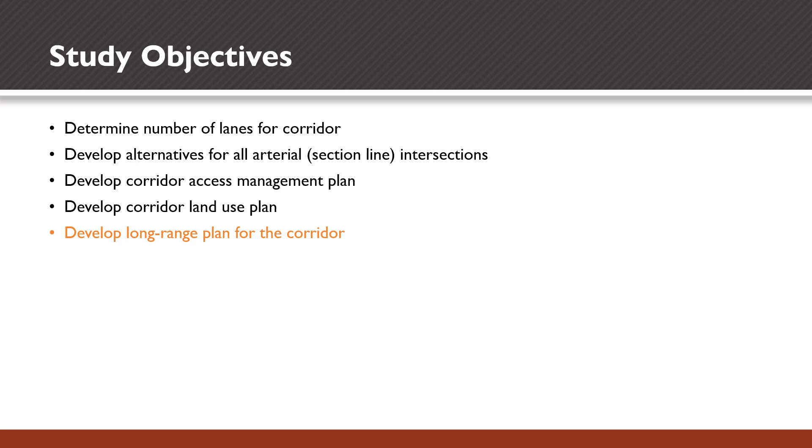There are 5 overarching objectives for the Highway 106 corridor study, and those include determining the number of lanes for the corridor, developing alternatives for all arterial section line intersections, developing a corridor access management plan and a corridor land use plan, and ultimately developing a long-range plan to help guide future planning and implementation projects while working towards a long-range vision of the corridor.

The study began in summer 2022 with data collection and baseline conditions analysis. Our first public meeting was held in October 2022, where we looked for your feedback on transportation-related issues and needs that we needed to address here as part of the corridor study. From there, we took that information and developed and refined alternatives, and most recently developed preliminary recommendations. We're bringing that information here to the second public meeting open house, and again, we're looking for your feedback related to the preliminary recommendations and the layouts. From there, we'll take that information, do any further refinement, evaluation, and ultimately looking to conclude the corridor study in June 2023.

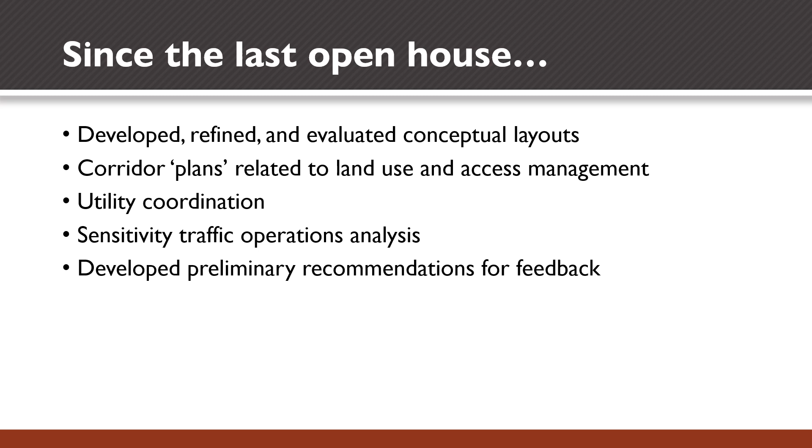Since the last open house, the study team has primarily focused on developing, refining, and evaluating conceptual layouts. This has also included developing corridor plans related to land use and access management, initiating utility coordination, creating a sensitivity analysis for traffic operations reflecting volumes that were higher than year 2050 forecasts presented at the first open house, and most recently developing preliminary recommendations for feedback.

There was considerable discussion in the first open house regarding future traffic patterns along Highway 106 following completion of Veterans Parkway between I-29 and the existing Veterans Parkway on the east side of Sioux Falls. Upon full completion of Veterans Parkway, we anticipate that there will be an immediate shift in traffic from Highway 106 to Veterans Parkway, and that will lead to a decrease in Highway 106 traffic volumes until additional development occurs along the Highway 106 corridor.

So based on feedback from the first open house and discussions with the study advisory team, we created a sensitivity analysis to increase Highway 106 traffic volumes beyond what we showed in that first open house for year 2050 planning horizon forecasts. And this accounts for that what if.

What if future development occurs quicker than anticipated, or that development occurs at a higher level of density and thus generates more trips, or development access is more focused to the Highway 106 corridor and less focused on the north-south arterial roadways. So this sensitivity scenario reflects Highway 106 volumes that are approximately 75% higher than what was presented in that first open house meeting for year 2050 planning horizon volumes.

And this accounts for additional east-west through traffic on the 106 corridor and more traffic turning to and from the north-south arterial roadways. The one thing I want to stress here is that all preliminary recommendations account for the analysis of these volumes, and the layouts shown here in this public meeting accommodate the volumes here within this scenario.

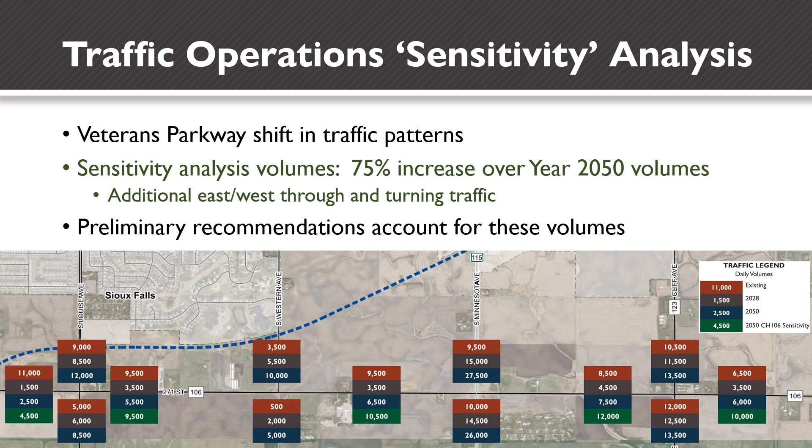The remainder of the presentation focuses on preliminary recommendations, and we've broken these slides into 3 main components. The first includes guidance type recommendations such as corridor land use, access management, and corridor typical sections. Next, we move into an overview of the recommendation timeline framework, and that sets the stage for the final component, which is regarding conceptual or layout type recommendations, looking at arterial intersections and roadway segments between the arterial intersections.

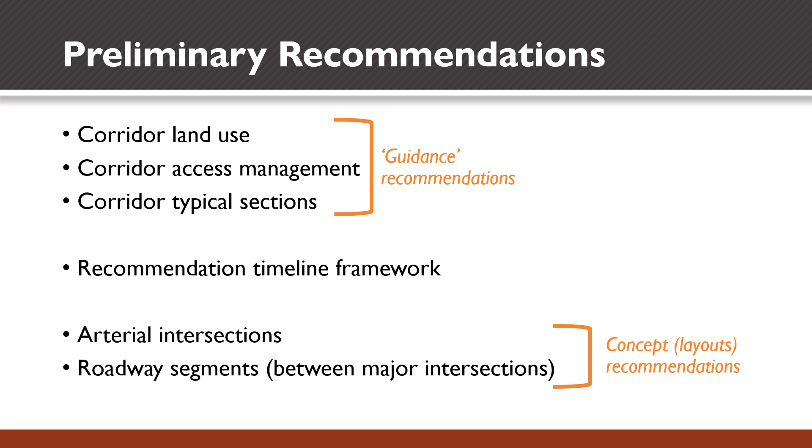The Highway 106 Corridor Land Use Plan is based on City of Harrisburg and City of Sioux Falls comprehensive planning efforts to date. Node-based employment centers are located at each of the arterial intersections along the study corridor. From there, the primary land use is anticipated to be residential, with higher density residential along the arterial corridors and transitioning to lower density residential as you move away from the arterial corridors. The land use plan also identifies existing natural detention areas, proposed City of Sioux Falls detention areas, and culvert crossings requiring drainage considerations and further analysis.

The Corridor Access Management Plan establishes a framework for managing existing and future access along the Highway 106 corridor. These recommendations are based on City of Sioux Falls Type 3 arterial guidance, which provides for full movement access points at quarter-mile spacing, signal spacing at every quarter mile, and median openings at 660 feet. Unsignalized access points may be added through analysis, and the separation between those access points varies.

Recommendations for managing existing access points are recommended to occur through future development, redevelopment to a higher land use, and transportation projects, and could accommodate a variety of different methods typical to the Sioux Falls MPO area.

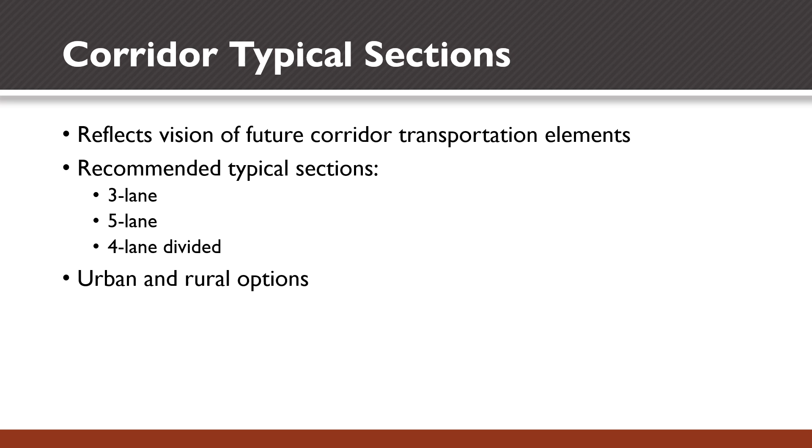First is the 3-lane typical section, which reflects a single through lane in each direction plus a continuous center left turn lane. Shared use path is located on both sides of the Highway 106 corridor out near the edge of the right-of-way to provide maximum separation between the shared use path and the vehicular travel lanes. The top view reflects the urban typical section with curb and gutter. The bottom view reflects the rural typical section with shoulders and roadside ditches.

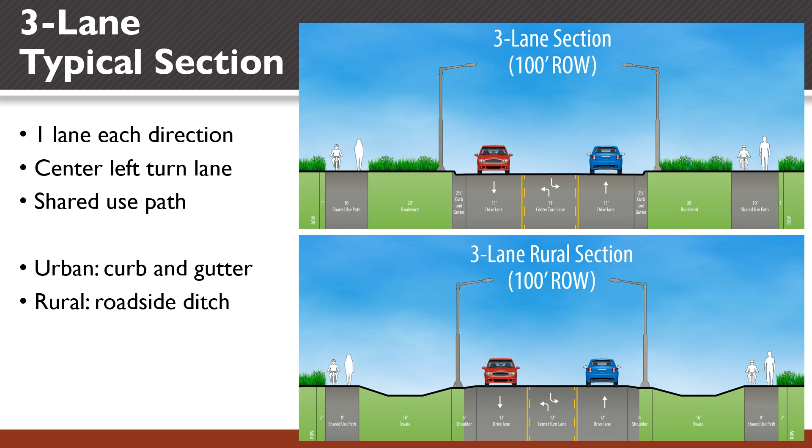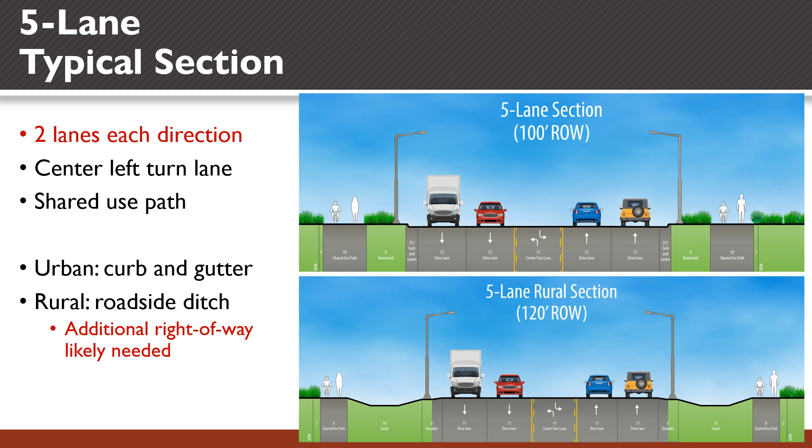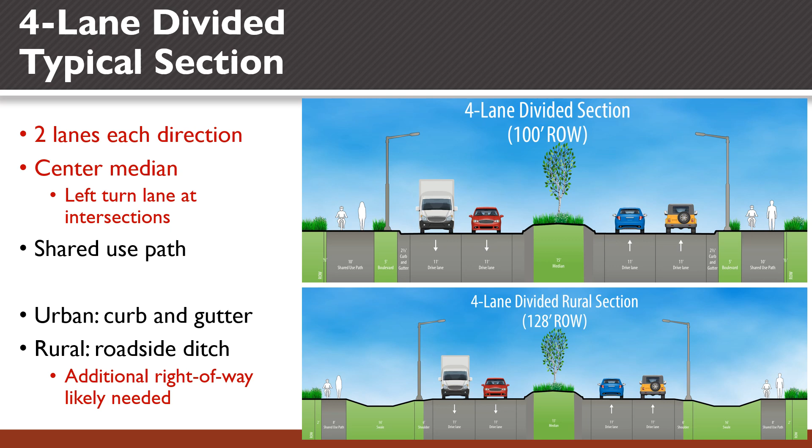Recommendation timelines were developed to support flexibility in planning for and implementing future projects based on corridor needs. With the anticipated shift in traffic volumes to Veterans Parkway upon its opening between I-29 and 57th Street, much of the long-range corridor traffic on Highway 106 will be generated by future development in the area. Therefore, recommended timelines coincide with Sioux Falls and Harrisburg growth area timelines and allow flexibility to adjust with any growth area updates. The short-term recommendations reflect implementation in the 0 to 10-year time frame and coincide with the initial growth area between Louise Avenue and Southeastern Avenue.

Midterm is the 10 to 15-year range, reflecting continued development between Louise Avenue and Southeastern Avenue, as well as a prompt for potential needs extending east to 480th Avenue. The long-term time frame reflects 15-plus years and circles back to the initial growth area between Louise Avenue and Southeastern Avenue to determine whether additional capacity enhancements are needed, such as intersection modifications or expansion to multiple lanes in each direction along Highway 106.

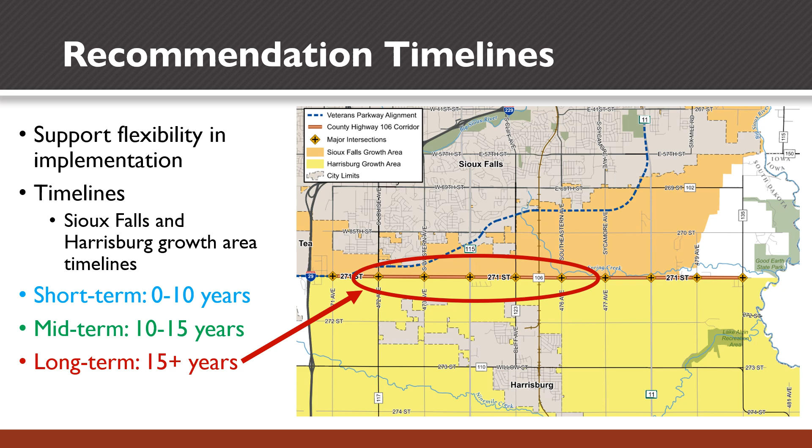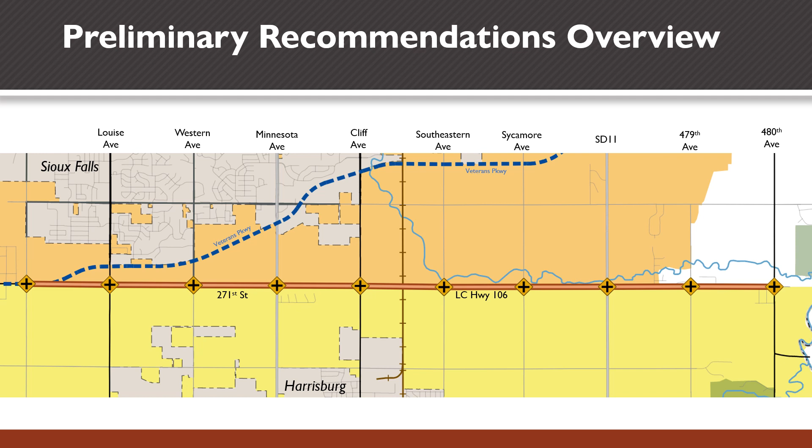The next few slides present an overview of the preliminary recommendations using the base map shown here, which includes intersections from Louise Avenue eastward to 480th Avenue.

Preliminary short-term recommendations focus on constructing a three-lane section between Louise Avenue and Southeastern Avenue to accommodate future traffic growth due to anticipated development in this area. There are two intersection options at Louise Avenue, Western Avenue, and Cliff Avenue, and Southeastern Avenue for your consideration, including a roundabout or stop control that transitions to traffic signals when warranted by traffic volumes. To the east of Southeastern Avenue, no modifications are recommended outside of monitoring major intersections for improvement needs and the planned South Dakota Department of Transportation project to reconstruct South Dakota Highway 11, which includes the Highway 106 intersection.

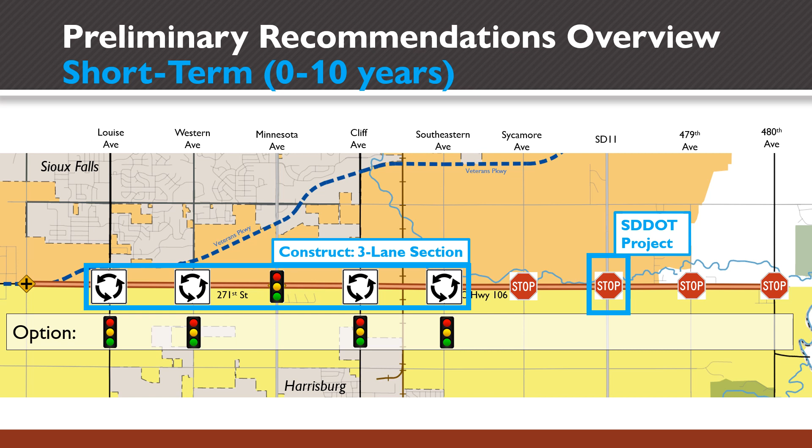Preliminary midterm recommendations shift the focus east to Southeastern Avenue to construct a three-lane section from Southeastern Avenue to South Dakota Highway 11, and then consider a three-lane section further east to 480th Avenue, as well as changes to intersection control, whether signalizing South Dakota Highway 11 based on traffic signal warrants, or considering roundabouts at 479th Avenue and 480th Avenue.

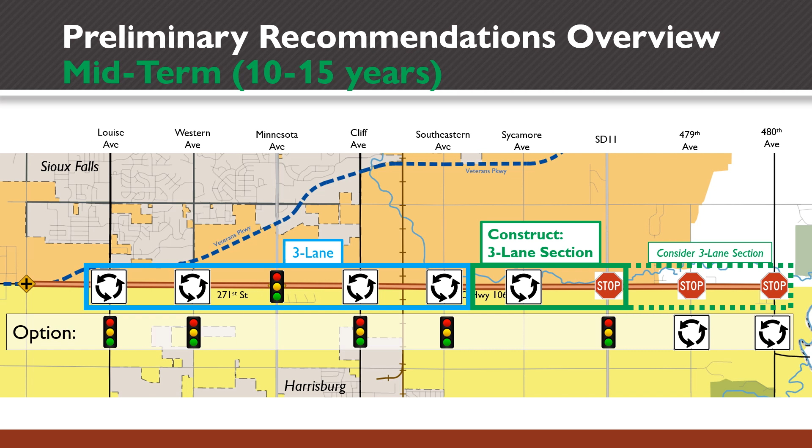Preliminary long-term recommendations reflect the long-range vision for the Highway 106 corridor. Through the traffic operations analysis, which included the sensitivity analysis, it was found that the greatest potential need for a multi-lane typical section is located between Western Avenue and Southeastern Avenue.

The multi-lane section, which provides 2 lanes in each direction, provides higher levels of capacity through the key intersections of Minnesota Avenue and Cliff Avenue, and extends that consistent lane configuration through the intersections of Western Avenue and Southeastern Avenue. In this instance, the 4-lane divided and the 5-lane typical sections are applicable.

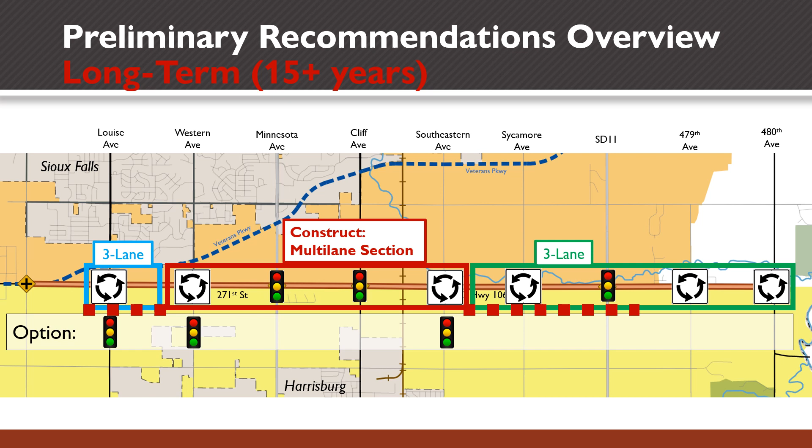Consideration may also be given to constructing a multi-lane section westward to Louise Avenue or eastward to South Dakota 11 based on long-range capacity and route continuity needs. Further to the east, the recommendation maintains or constructs the 3-lane section, if not already constructed, eastward to 480th Avenue. Intersection options for a roundabout or signalized intersection are shown at Louise, Western, and Southeastern Avenue intersections.

Preliminary recommendation layouts reflect conceptual layouts that bring everything together to help visualize the preliminary recommendations. This includes recommendations regarding major intersection options, different intersection types, traffic control and lane configuration, recommended typical section elements such as number of lanes and shared use path along the corridor. Also included is recommended access management in terms of identifying where potential quarter-mile full access intersections may be located.

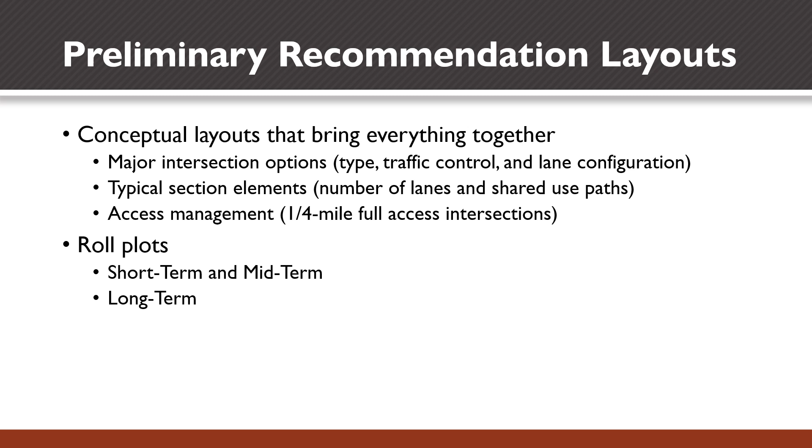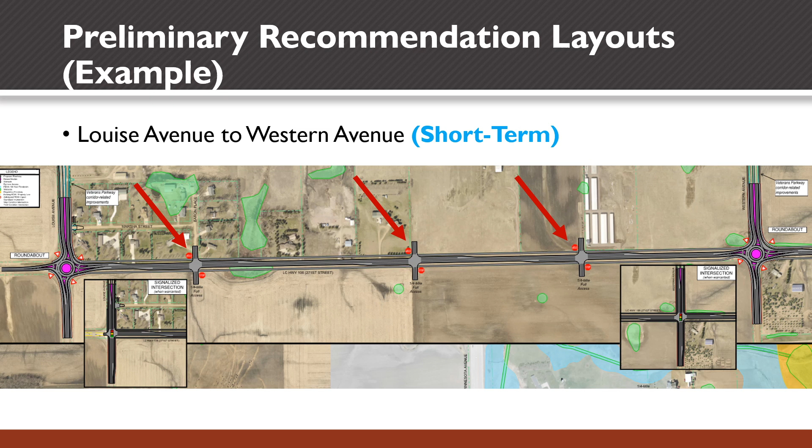There are also a couple display boards that show additional roadway segment concepts between Cliff Avenue and Southeastern Avenue. These concepts include railroad grade separation, where Highway 106 would go over the existing railroad track, and also access management concepts to the east of the railroad tracks with regard to access modifications, frontage and rearage roads.

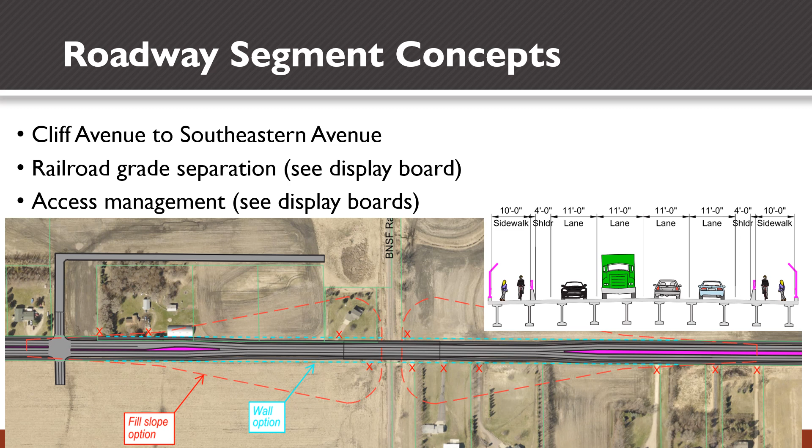A common question is, how will the study recommendations fit with potential near-term corridor improvements? It's important to remember that study recommendations reflect the long-range vision of the Highway 106 corridor and facilitate incremental improvements, all working towards the long-range vision.

An example is, what if a roundabout is desired at Western Avenue or Cliff Avenue before Veterans Parkway is fully open and we see that shift in traffic volumes from 106 up to Veterans Parkway? The response would be that the roundabout design should accommodate the future corridor cross-section, which would be a three-lane section, and incorporate the multimodal elements such as the shared use path on both sides of the highway.

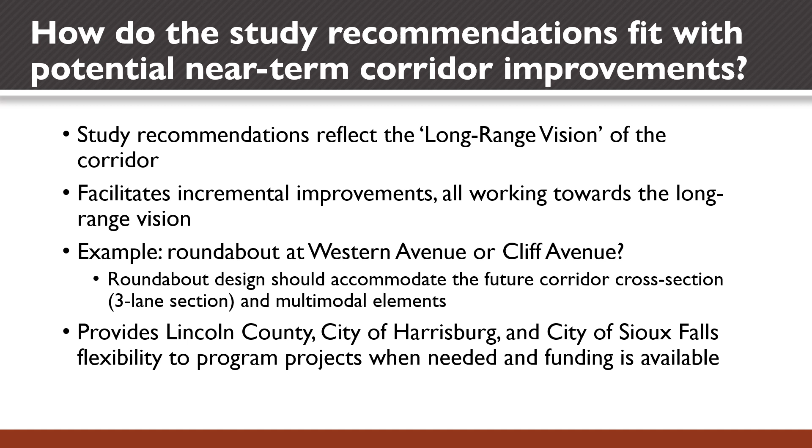And ultimately, this provides Lincoln County, City of Harrisburg, and City of Sioux Falls the flexibility to program projects when needed and as funding is available.

Finally, we'd like to touch on a potential connection between Tallgrass Avenue and Louise Avenue. At the first public meeting, we received considerable feedback on the various options presented, which we greatly appreciate. With consideration to this feedback and further analysis and discussion over the last several months, it was determined that no recommendation for a specific alignment or future project will be made as part of this study.

However, in the study documentation, we are proposing to highlight the importance of a future connection being implemented as part of future development through a collaborative planning process between developers and government agencies. It is important to note that some sort of east-west connection will be needed at some point in the future to provide access to future development throughout the area, with the connection being established as part of that development.

There are several locations throughout the metro area where in hindsight it would have been nice if an arterial or even a collector connection was provided. Once that opportunity passes to construct this connection, it can be difficult or very costly to provide once the area develops. Establishing a through route as part of future development provides beneficial connectivity and continuity between Tallgrass Avenue and Louise Avenue, reduces the need for short distance trips on Veterans Parkway, and would help minimize neighborhood cut-through if there wasn't a designated connection.